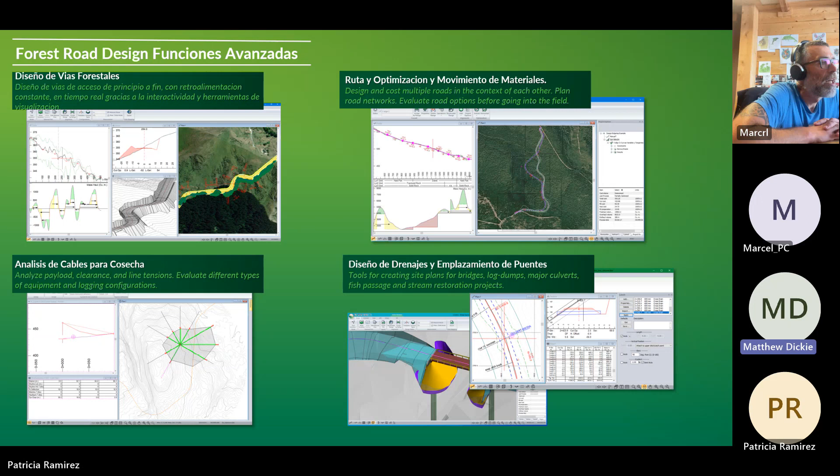All right. And yeah, I'm probably gonna end up apologizing a few times, but I didn't catch any of that. I'm going to turn off my camera to save some space here. I'll do the same. So I had a look at the files you sent.

My first impressions are, well, this is great. This guy gets it. So I guess with that, I'd hazard a guess my usual spiel isn't going to be as valuable. Is there any particular areas you'd like to focus on when I work through the process? Just given where you got with your trial.

No, I would like to see the same process that I made done by a professional. Okay. All right.

So, a lot of this stuff, I'll just start from square one. A lot of it's going to be stuff that you're already aware of. But the software is modular. So we're going to start in terrain, and then we're going to switch over to location.

Now, with this, it looks like you built your topo surface with the existing contours. Is that a fair assumption?

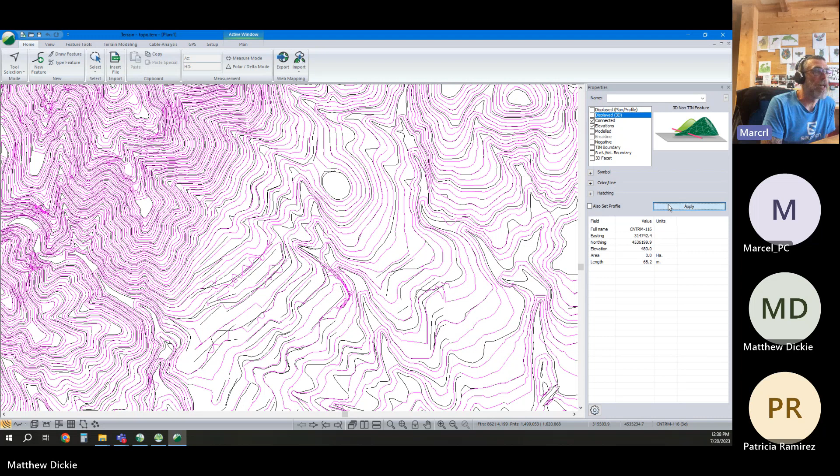This is data that they have available publicly, but he added more contour lines to densify it and have a better view. They have data available every 5 meters.

So when you brought this in, it would have been insert file, you would have grabbed your data, then clicked generate, and you would have gotten the contours that you've produced.

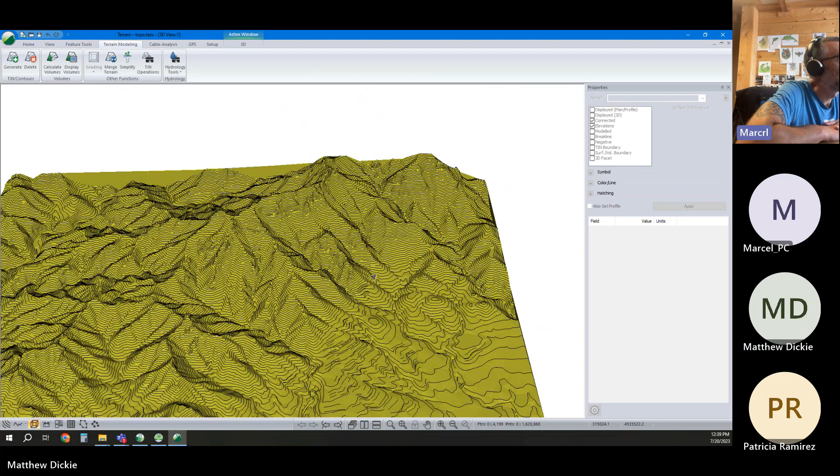One thing I'll mention: by creating additional contours in our software, it's not going to change the surface, it'll just give you added context of where things might be.

Another note is the contours come from some other source. Spain has an open portal where you may be able to find the actual source data, and if you use either a LAS file or a DEM file, it'll fill in the additional details that land in between your contours.

On the steep stuff, it's not as big of a deal, but when you get into these kinds of peaks or flatter terrain, it'll give you additional information that fills in that data for you.

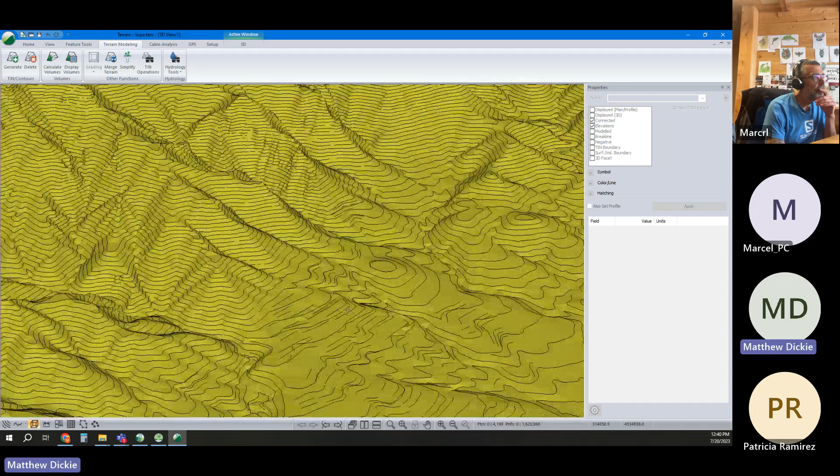So again, it's maybe an opportunity, but at the same time you've got a surface, and we can certainly work with that surface.

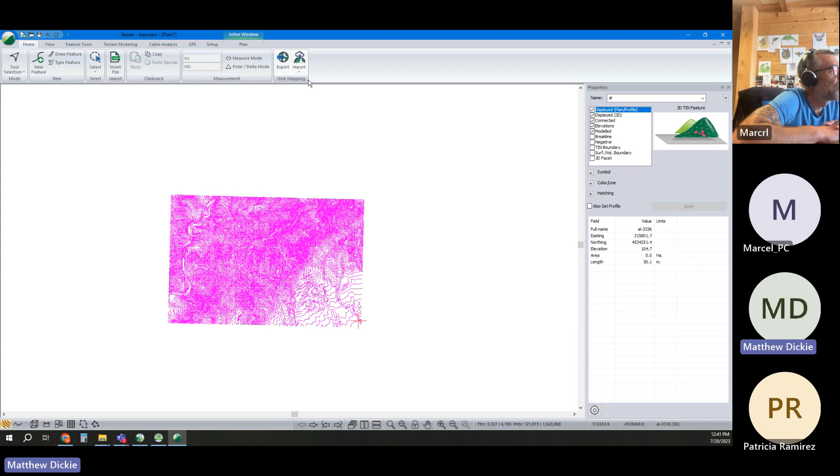The other thing I'll mention is you've got your projection set. If you want a little added context of where things are at, you can click home and import live maps, and download an image of the area to have as a background.

Are you able to guide me into the area that you'd like to focus your project on? I don't understand you right now.

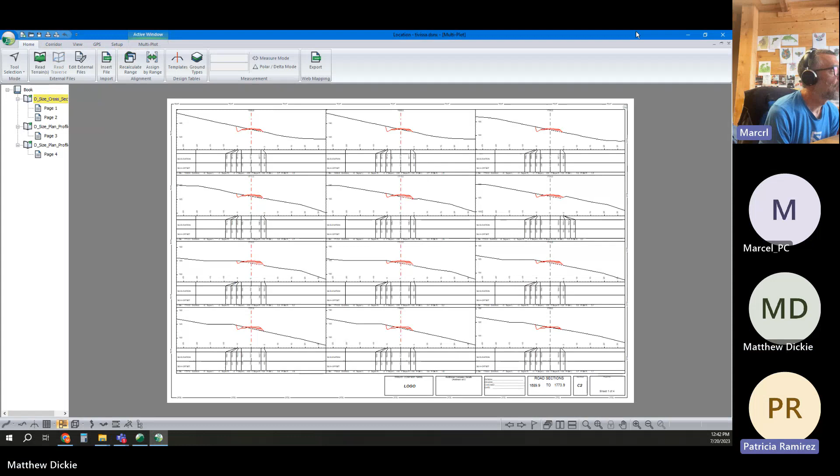Marcel, ¿te parece que está hablando muy rápido? No, yo le entiendo, le sigo. Hasta que preguntes no puedo en español, pero sí, no te preocupes. Sorry, all good Matt, I'm going to help with the questions. All right, perfect.

Now where are we at here? Right, so we've got this KML, all right, so that's...

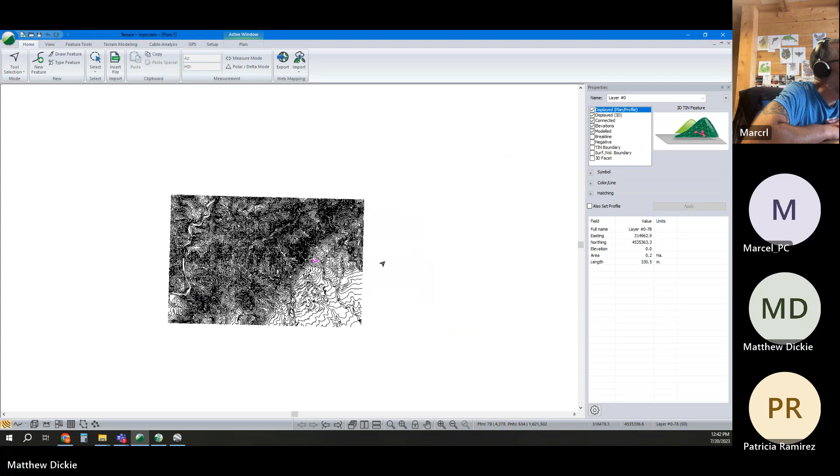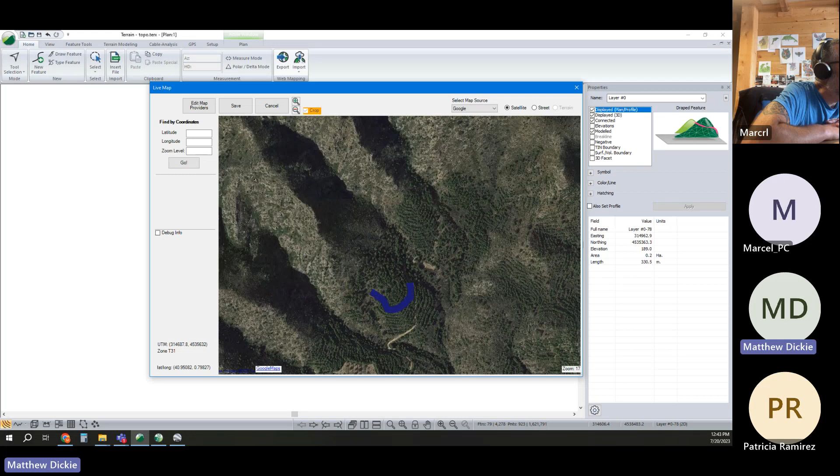With this, I'll do that same thing, but with that feature selected, it'll zoom into where we want to be. I'm doing this so we don't have to download a larger area than what we need. So we've got that.

You are opening my eyes, you know.

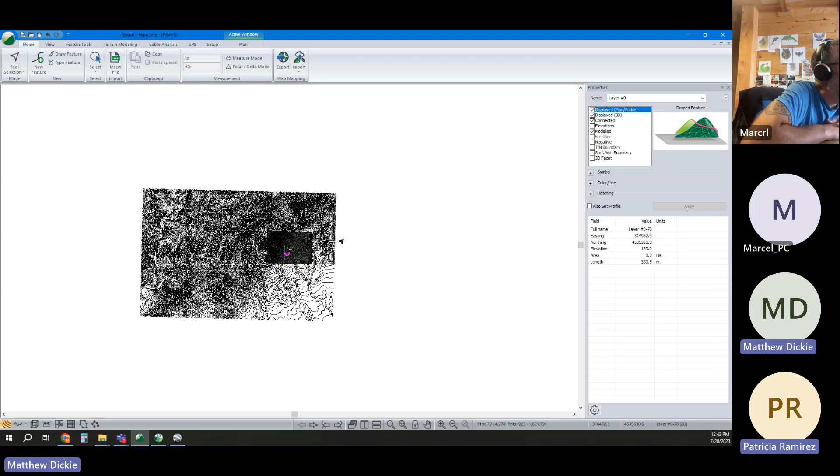All right, I'll just save this as an image, and this gets dropped in the background. So now as we're clicking around, we just have a little bit of extra context for where things are that we'd like to put them.

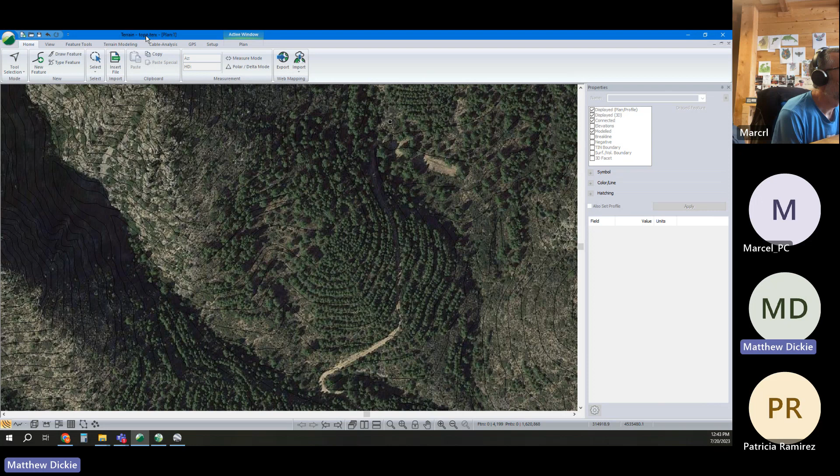So I won't save anything here, we'll just continue along with your topo file. And just for the sake of going through the motions, we can jump over to the location.

We're going to click File, New File, browse to where we have that saved, and I'll just start at the center of terrain.

And we've already taken the time to download that image, so we'll right click in our plan view, click Plan Options, click the little plus next to our background, and select that image, then click Open. There's a draw order here, so we want the image at the top.

And that is over here. I'm going to just grab that point and move it over here.

And I guess we probably should have saved that. You can work with that if you are in ArcGIS, or yeah, that's it.

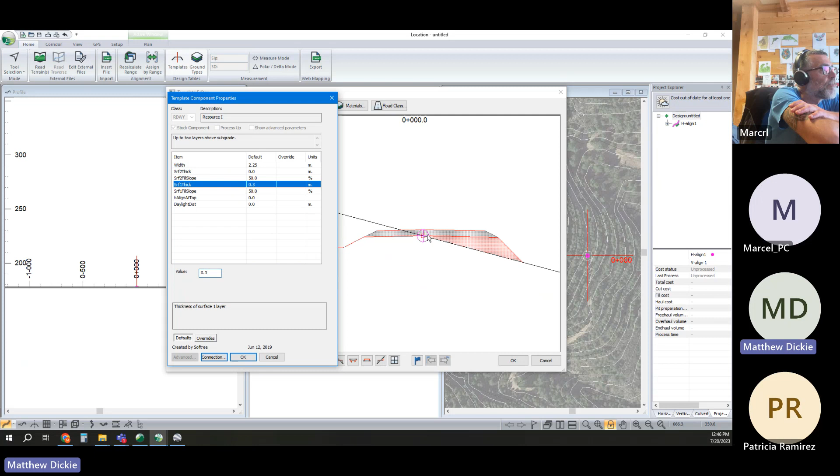Are you putting surfacing material down? Aggregate? 30 centimeters of material, okay. And then we can set our fill slopes to be whatever we'd like for that as well.

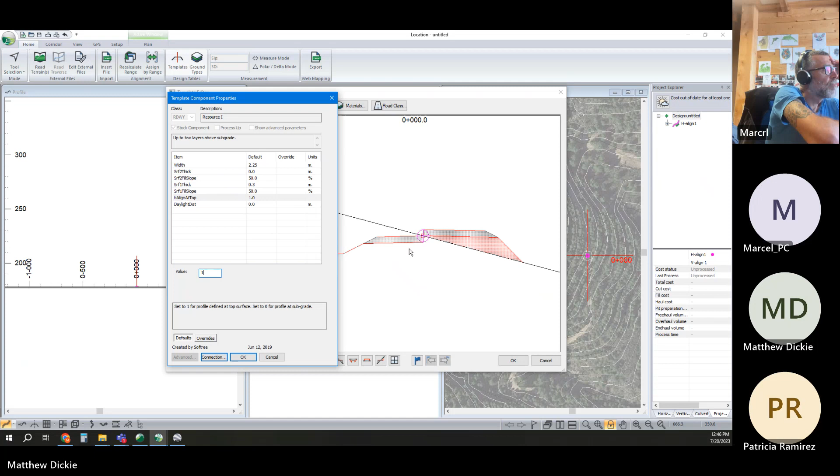I'm going to switch this so my road is set on top of my surfacing rather than subgrade, or the center line. We could do the same on the other side, or we can just click delete, hit copy, and paste that to the other side.

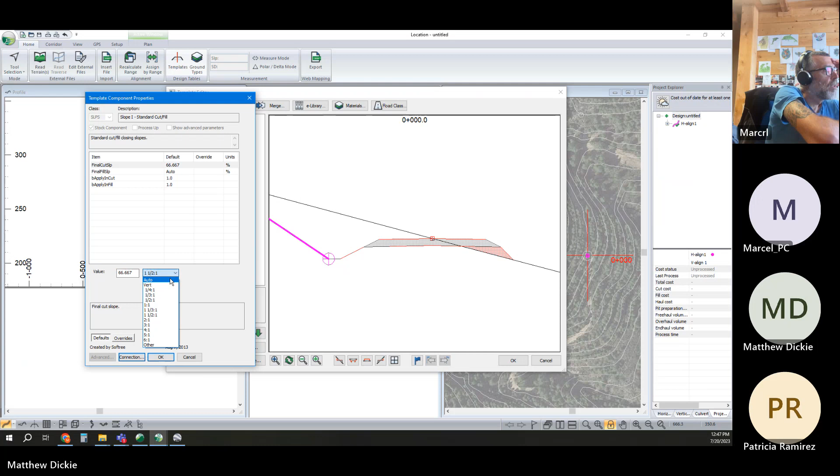Okay, so ditches, very similar — we can change our parameters to whatever we'd like. And then slopes, I'm going to leave it as auto, but if we wanted a fixed cut slope value, we could come in here and say, well, let's go 1.5 to 1. I'm going to leave it at auto though, and I'll talk about what that is after.

So this default is great if your road prism's a simple gravel road. If you have something a little out of the ordinary that you want to account for, you can go onto the E-library, which has a collection of pre-made components that you can pull in.

So if you had something where you expected big cuts and fills and wanted something special, let's do a bench cut just as a talking point here.

So we can come in here and say, well, let's paste that bench cut parameter in here. We don't want to apply it in fill, and we'll set our bench height for bench base width — we'll go 2. Now if we get in that condition that warrants it, it's going to add a bench for us automatically.

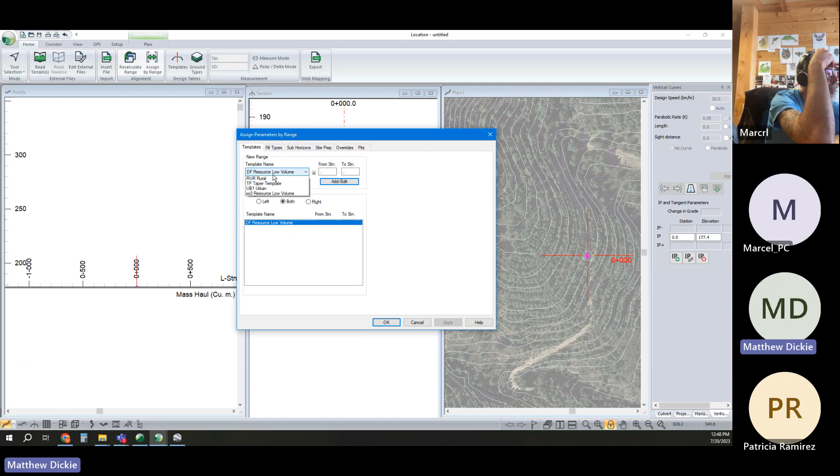But I don't think we'll need it for this one, just for the concept. So I'll hit OK, and the default template is applied. So we've got our roadway looking like that, and then we can come in here and start designing.

Now I'm going to hit the zoom to extents button. So as I click through, we can see what the ground's doing underneath. If I pull that up, we can see we're getting more of a slope.

I'm going to hold off on adding in a bunch of IPs for my curves. So instead — can you see me right now? In my PC, I don't see you. Okay, no. I can stop sharing my screen and turn it back on. One moment.

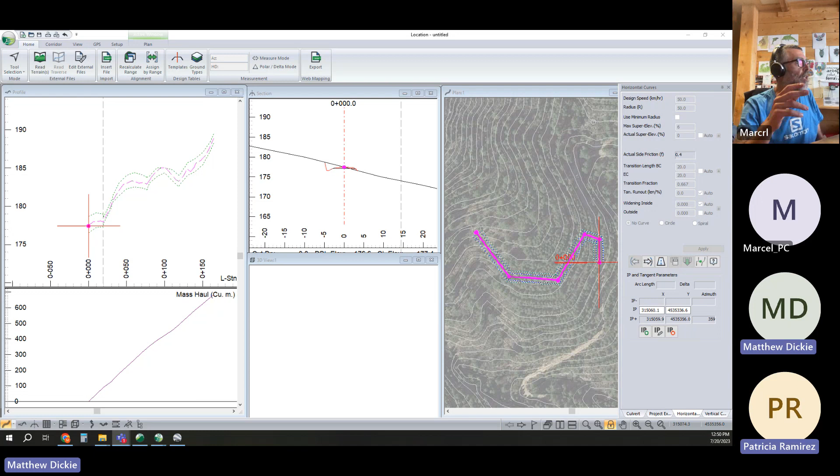Well, I can see you on the phone. You can continue while I wait — I don't mind waiting if you want to move things around. Do you want to exit from the computer and try to start again? I'm doing that. Okay, I can hang tight. I think it would be hard to watch on a phone, so I don't mind waiting a few minutes.

Okay, so as I clicked in my horizontal alignment, I've just clicked in the main turning points, and then I'll add my curves to that.

So I'll go over to my horizontal curves panel, which I can access over here as well. I'll say I want this to be a 20-meter curve to start, but it's giving me a warning that it doesn't fit. So I'll pull this out a little further, until I can fit the curve I'd like, and I'll go 18 instead.

So we're gonna have a big old cut right off the start. And then we can contour around, we can go to the next IP. I'll go with a 35-meter curve. And we can continue along that way, adding our curves in.

Now, as we do this, it's all interconnected. So I'm going to just zoom to extents on my 3D view here. This doesn't affect the design at all, but it makes it a little easier to see. And I'll just set this up.

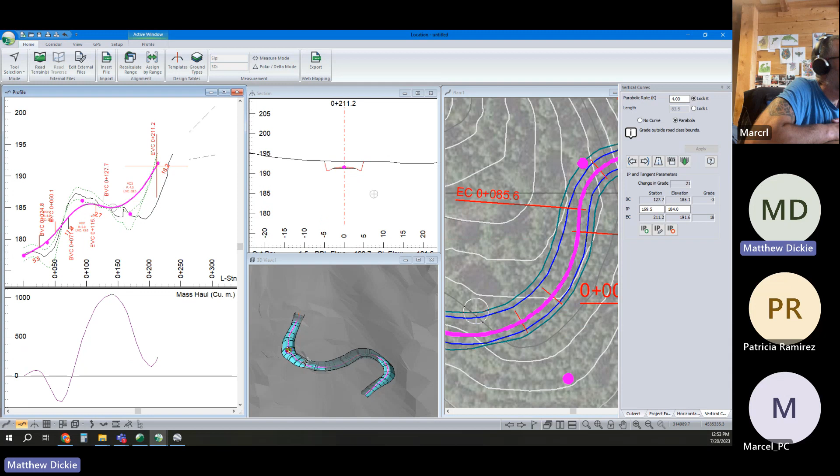Now I'm going to hit undo. I liked where I had it the first time, and yeah, we can see as we move our fill into a lower position, that cuts and fills are changing our model.

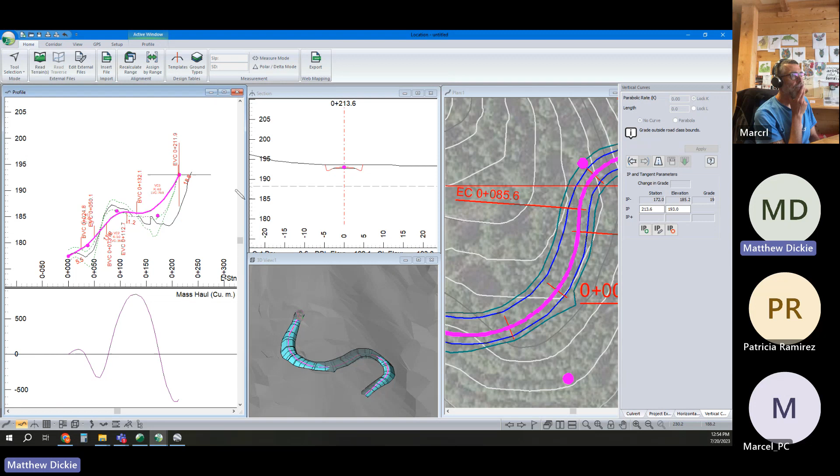So great, we can take this, and I'm going to just let's drop that a little bit further.

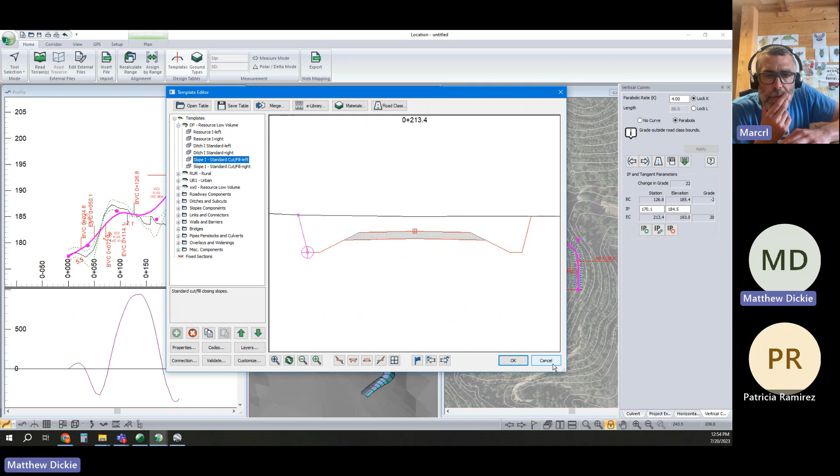So if we want to leverage this portion of the software where we have auto selected, we can assign different ground types along the length of our road. So if we expected this cut portion to be in rock, and it's going to cost more than our other materials, we can assign that.

So we could say, well, this nose is going to be shallow bedrock from station 50 to 120. We can go up to assign by range. We can go into our subhorizons, and we can say, well, most of our material is just superficial materials, so we'll call it hardpan. And then for this other section, we'll say that we've got hardpan over solid rock. That hardpan is only 50 centimeters deep, and we'll apply that from 50 to 120.

So when we do that, we can see we've got that cut slope angle here. That differs from our cut slope angle, say out here, where we've just got that superficial material.

So you can build out these libraries of different ground types in our ground type editor, where you can set different cut slope and fill slope angles for different materials. You can add new materials as you see fit.

And then a really nice thing is you can add expected costs to it. So if we expect that drilling and blasting is going to be $28 a cubic meter, we can put in whatever we'd like for a number, or we could change it. We can have a fill cost associated with it, and we can have our movement costs assigned in here as well. So we can account for the longitudinal movement of that fill material to be moved ahead.

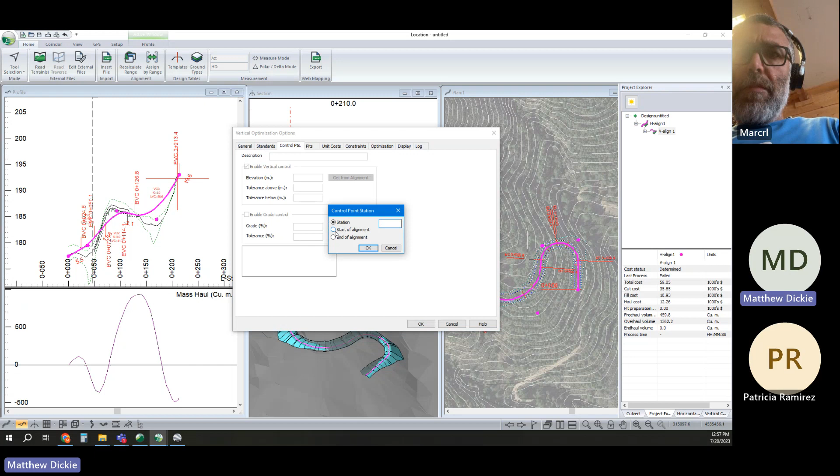We can hit OK, and rather than going through and designing that by hand, we can click vertical optimization process, and the software is going to move that road up and down to minimize our costs. So if I'm letting the software do it, I've got my costs from, well, this number here down to this number here, so 32.

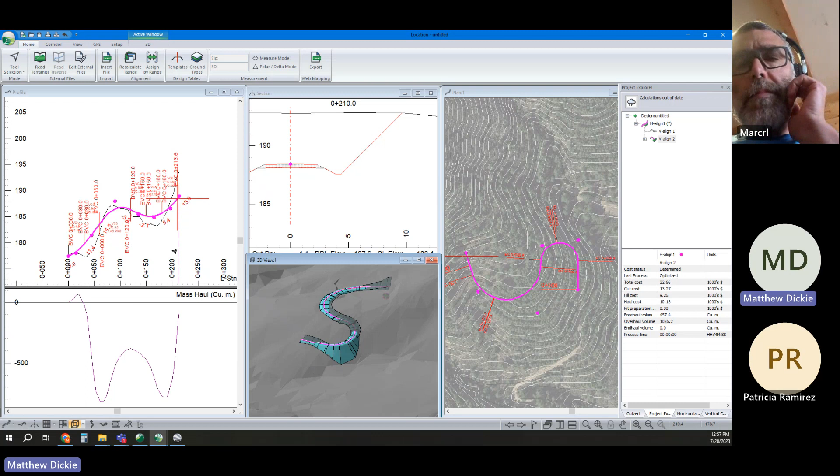And yeah, so that's optimal, and it does a very good job of tracking material movement. So it's using something a little different than the straight mass haul, so we can have different materials going different directions.

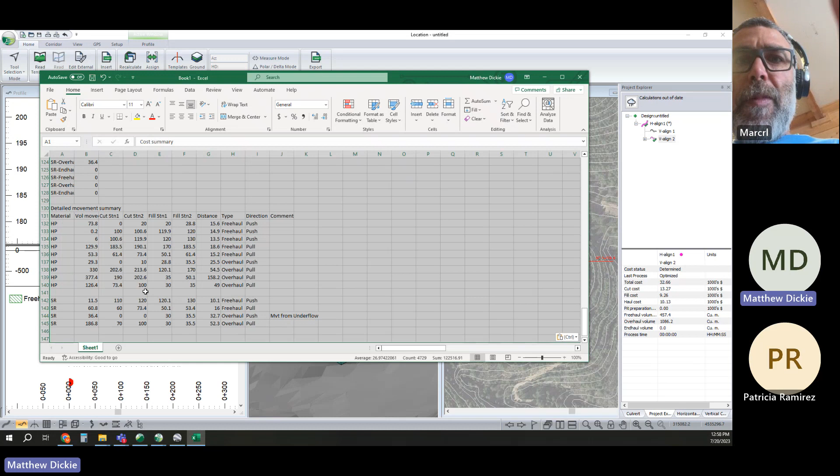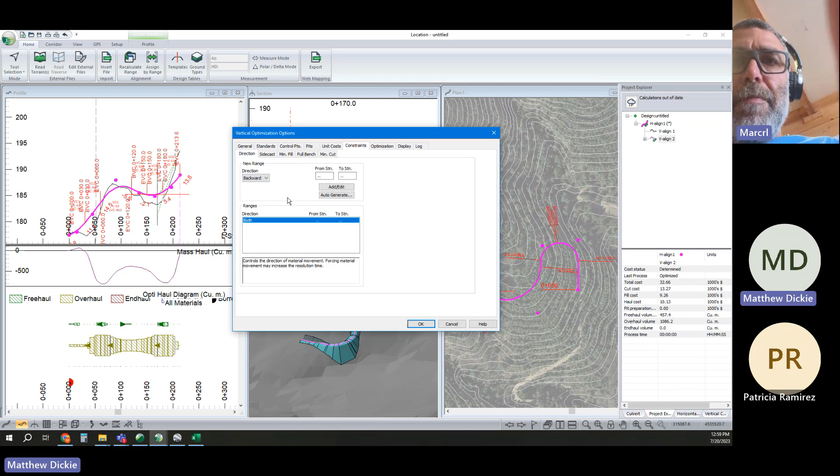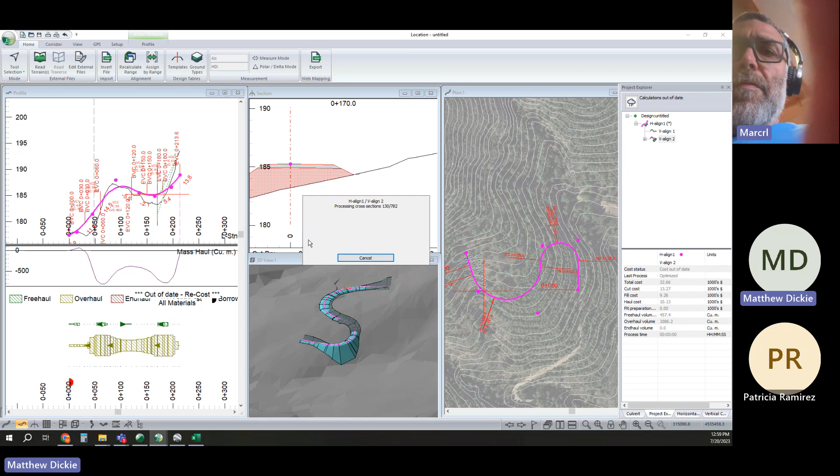And we can add pits and spoil sites. We can also, if we're building this and we aren't going to be able to move material ahead, so if we can't take our cut material from here to there, well, we can assign that this cut can only be moved backwards from the start to station 120. Now this is going to increase our costs because it's more constrained, but it's got a different solution that accounts for the fact that we can't move that material to fill in that position up ahead. So it's fairly smart and flexible to account for the things you want to account for.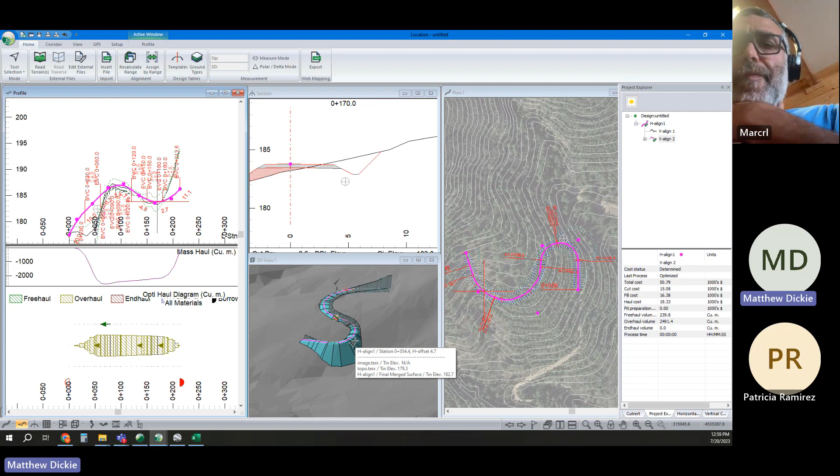I'm going to just cheat, I'm going to remove that.

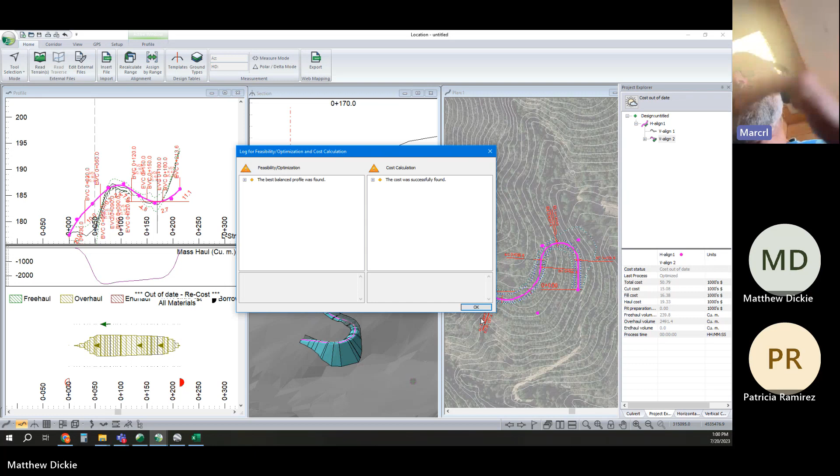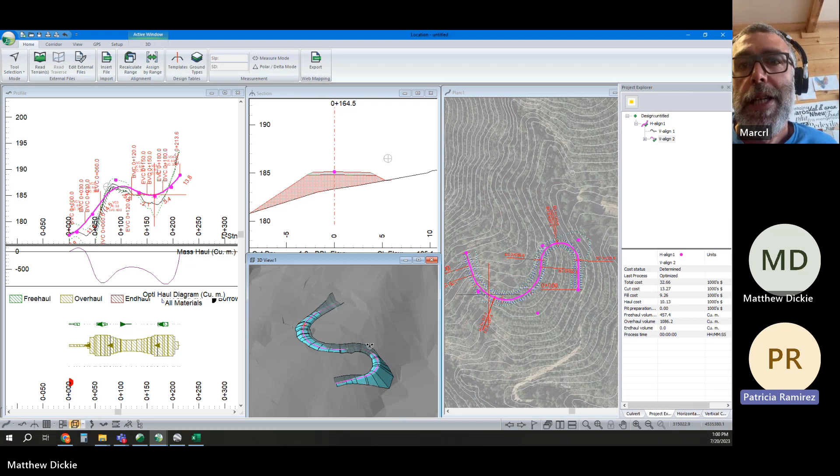All right, oh, go ahead.

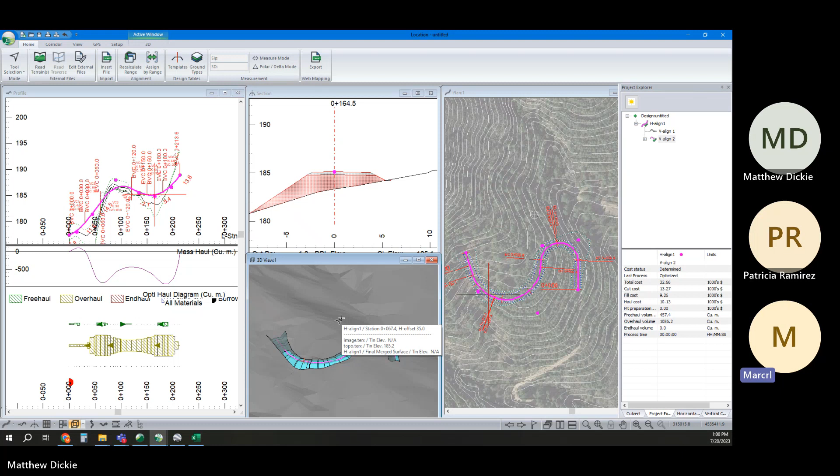Just a sec, Matt. Yep. Okay, ready. You can continue, please. All right.

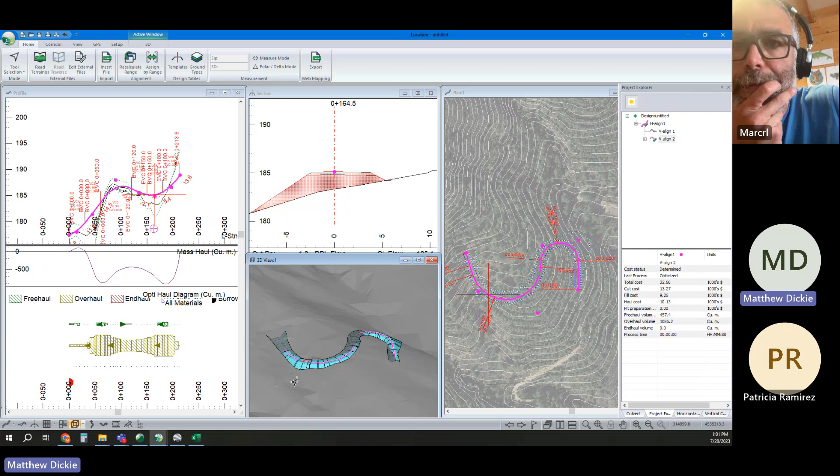Yeah, so that's optimal. And then if we want to continue with our design process, we can of course add in things like your culverts. So I've got my culvert panel here, we can access that over here. So I'll add in a culvert. I can change the dimensions of that, so if I want that to be a 450 mil culvert instead, we can.

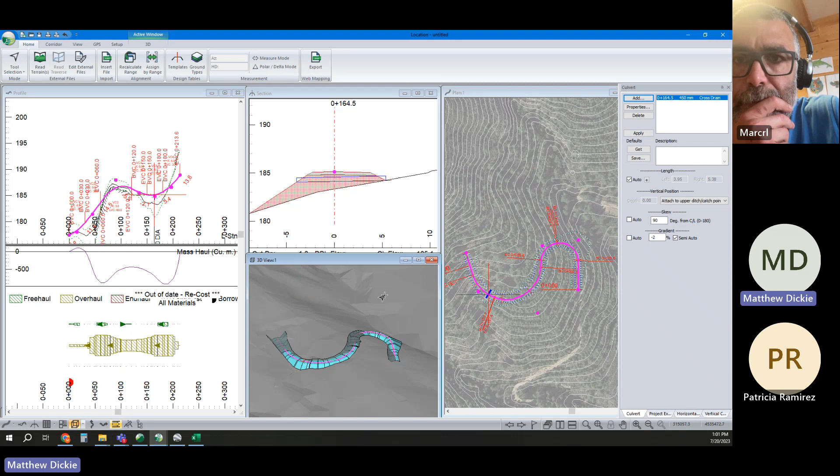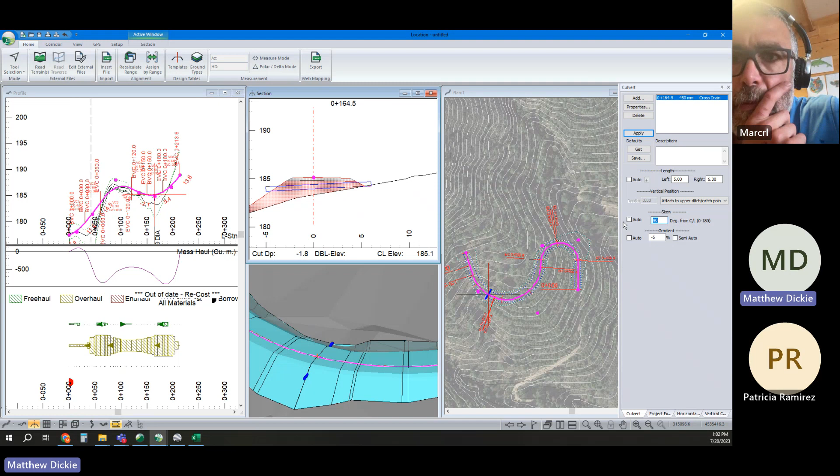Yeah, so that's culverts. Now, all of this stuff, it's nice to have a tabular breakdown of it, not just the graphics, so we can produce a data table.

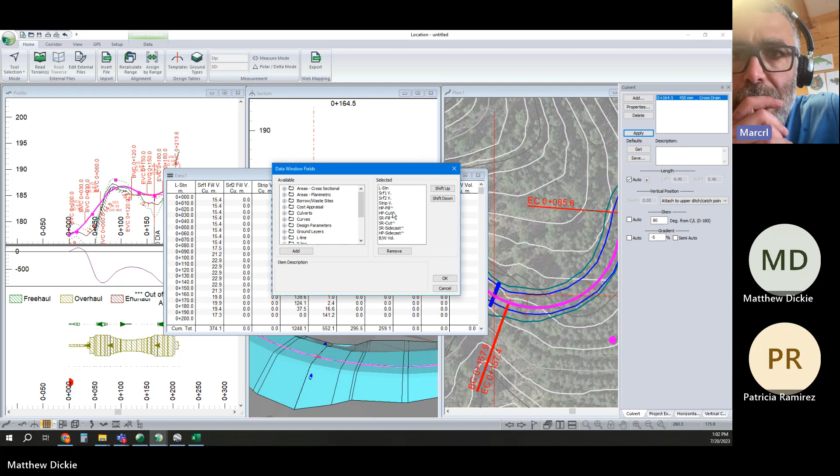So we'll come in here. Now I'm going to include totals, I'm going to get rid of a bunch of this stuff just because it's a lot of noise. We'll start from scratch, and I can choose, well okay, I want to report my cuts and fills. But instead, if I want to report my specific materials, I can go into the volumes OptiHaul and say, let's look at our solid rock and hard pan cuts and fills separately for those different material types.

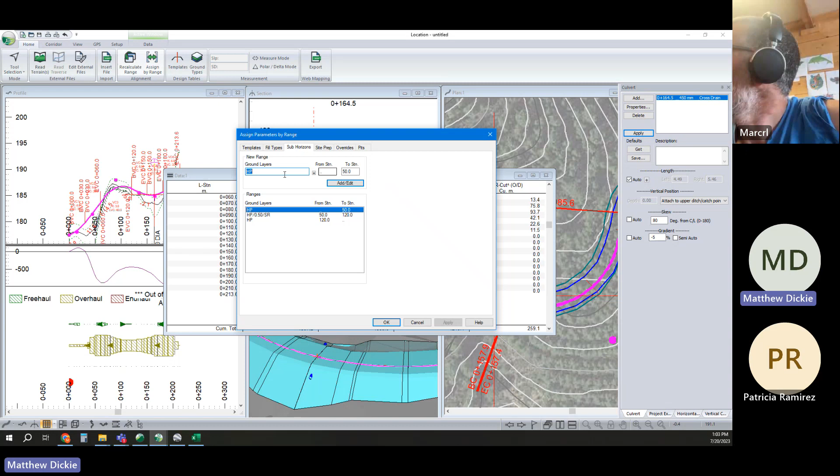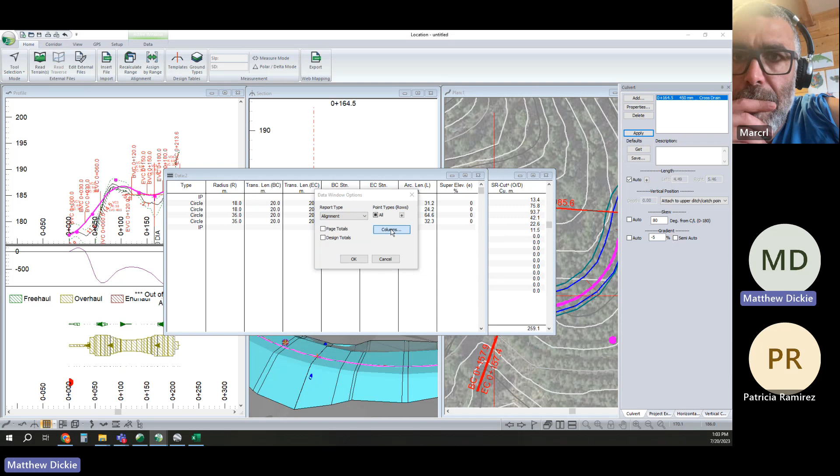So it's mostly the solid rock or the hard pan that's our cut and tracks with that. We can do other data tables as well, so if we added a bunch of culverts and we want to populate that, we can come in here and say let's look at our culverts. We want culvert diameter and length, and we'll probably want the station as well. I should have added that in.

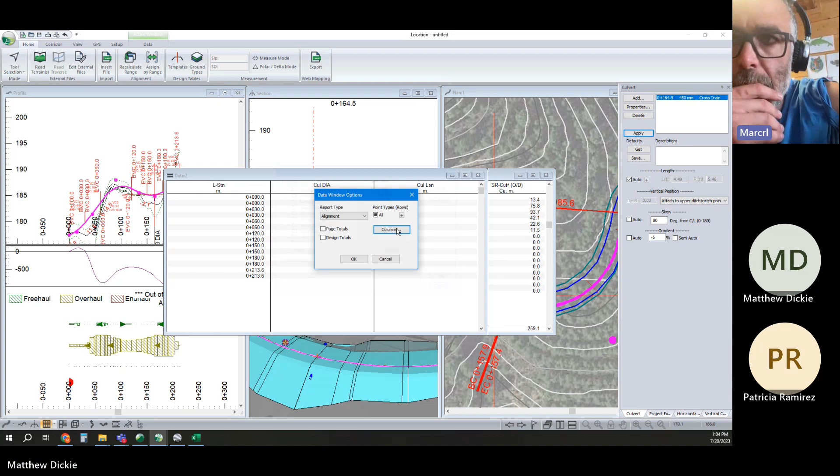And instead of just reporting it every so often, I want to see this reported just where I've added culverts. So instead of using my profile points, I'll go down here and choose my culvert insertion points. And there we are.

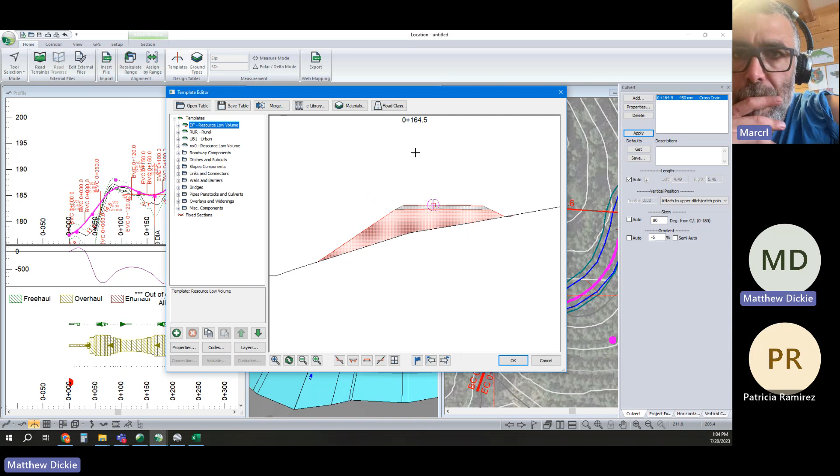So all of these things that I've messed around with, like our templates, we can save our templates for future use. We can say, I want to save this as default. And if I save over my normal TPL, that'll be what appears when you open the software next time for your next project.

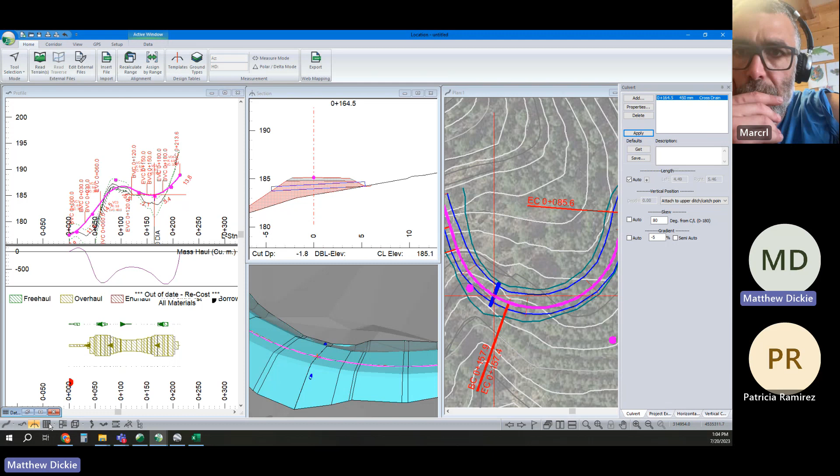If I want to save the screen layout with all these data tables already set up, we can save that as a screen layout here. So view, screen layout, save. And if I save over my normal, these windows are going to be positioned and line types set up to suit when I open the software.

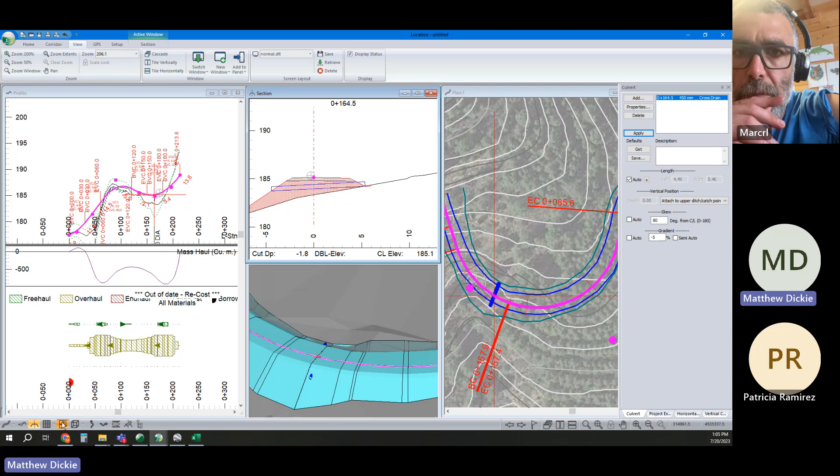And then if we're happy with our design, we can go over to this little button here, which is our multi-plot editor. We can set our page size to whatever we'd like, turn on a grid to make it easier to edit things, and build out these documents from scratch if you'd like.

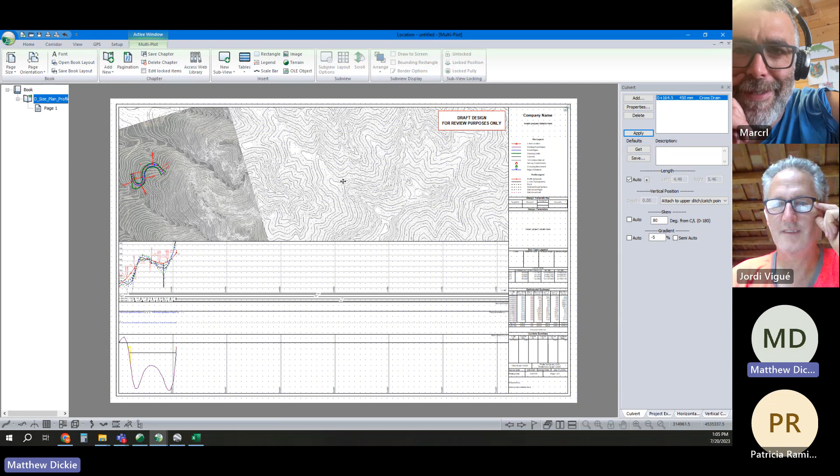Or, it's not that fun to build these by hand, so we can always start with something that's already been formatted. And we can customize this. So I'm going to change my scale to be 500.

I'm going to customize what we're looking at here as well, so I want 500 by 100. I'm going to control what we're seeing for subviews down here. So let's remove that, let's remove that, and let's go with a 30% size. So we can customize what we're seeing there.

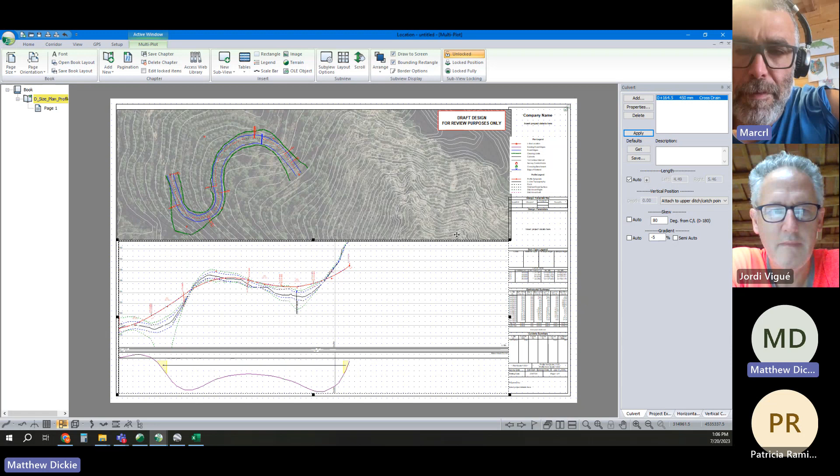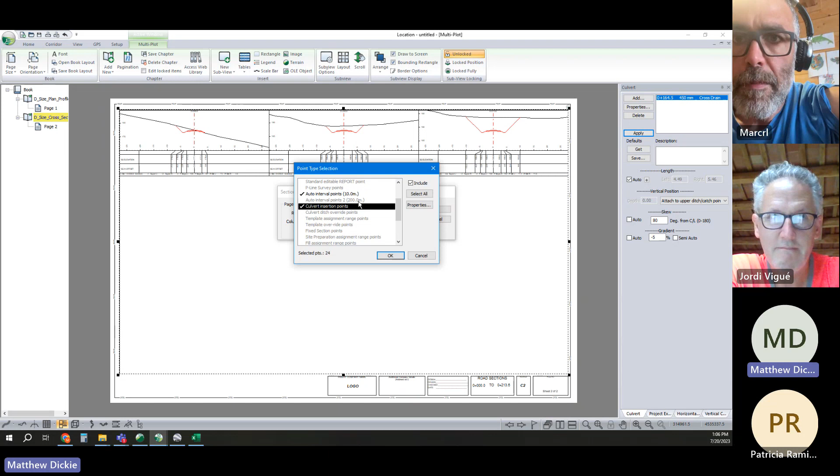And we can add in additional chapters for things like cross-section geometry. For this cross-section geometry, if we want to control the frequency that we see those cross-sections, we can highlight the subview and change our point types here. So if we wanted every 10 meters and anywhere that we've added a culvert, we can turn off whatever we had selected, turn on the ones we like, and customize them if we'd like to change the spacing. And there we are.

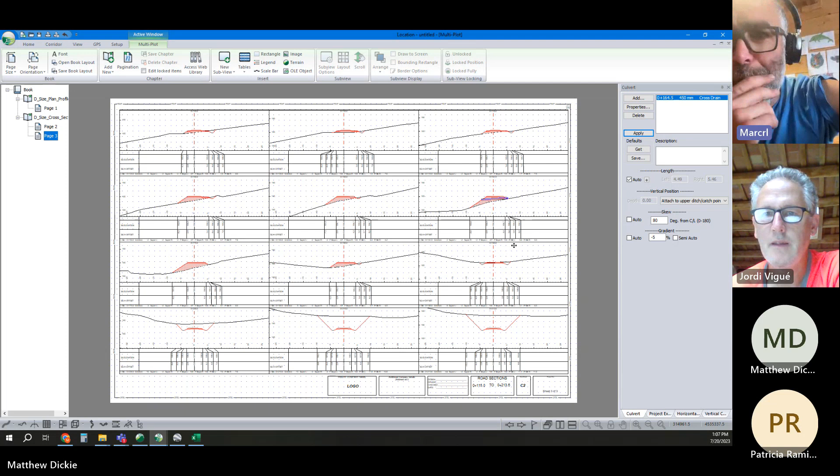And that is kind of my typical spiel. So, any questions? No, not for me. Well, this is Jordi, we work together a lot of times. He's a forest engineer also. Nice, hi Jordi.

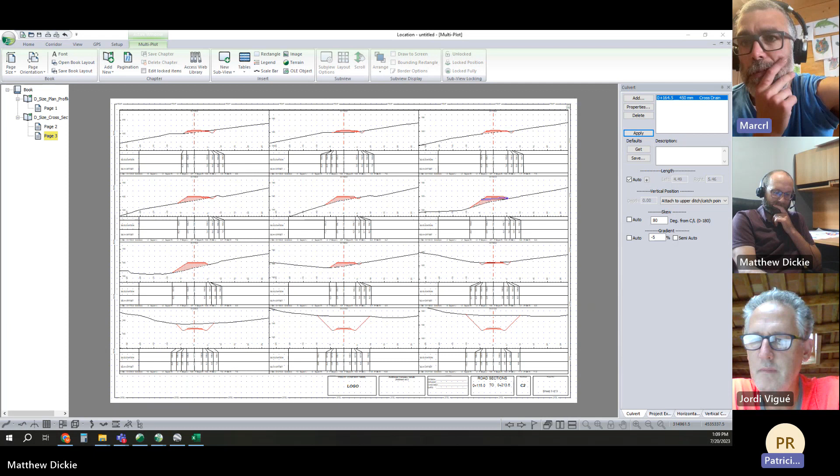Sorry Matt, can I steal the screen from you? Yeah, absolutely, I'll stop sharing. Thank you. And we were talking just about a little bit about pricing here.